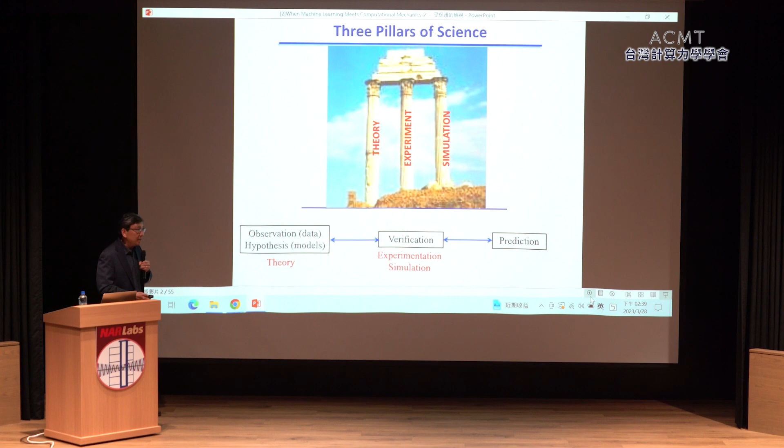Well, I would have to say maybe before 1970s, there's only 2 pillars, theory and experimental work. At that time, people don't trust computation. But now, I think computation comfortably become the 3rd pillar. Well, maybe it's time to add the 4th pillar, right? So let's see. The objective of all the science field, it's all about doing prediction. If the science does not lead to prediction, then it's really not very meaningful. And to do prediction, then you do theory, experimentation, and simulation. So where are we now?

Every time when we model a problem, of course you start with the most important, either physics or chemistry or mechanics or biology for the problem. You first make your decision on that. And then you construct the mathematical models. Some of the mathematical models are reliable, but some are not. So even Newton's law works only up to a certain length scale. Below that it doesn't work, right? And you know quantum mechanics, and everything now becomes statistical. But anyway, this is how we usually do things. And then once you have mathematical models, then you do simulation.

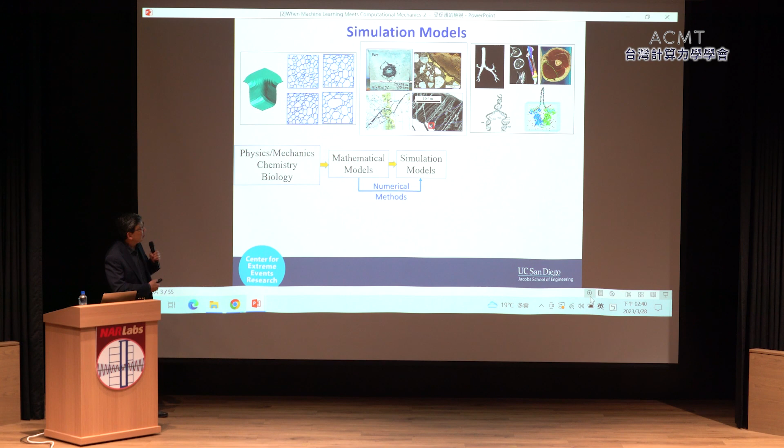So here this is where many of us are working, developing effective numerical methods to solve mathematical equations that are the models of certain physical problems. And then you use computer to do the simulation. But in the end, you always have to ask two questions. Are we solving the equations right? And that's verification. When we develop numerical methods, we always develop mathematical error bounds, you assess how fast the solution converges. Well, first of all, does the solution converge? And then how fast it converges. So that's one type of verification. But the other type of verification, if the problems are too complicated, then you do experiment. But anyway, we do this.

And I will say that finite element method has been developed over 50, 60 years ago, actually 1950s. That's the beginning of finite elements. And until now, there are many different classes of simulation methods, such as Meshfree methods that are actually more recent advancement. Most of the time, I think we do a reasonable job here. And so I think this is most of the time okay. But the next question is, are we solving the right equations? That comes to this. This may or may not be the case.

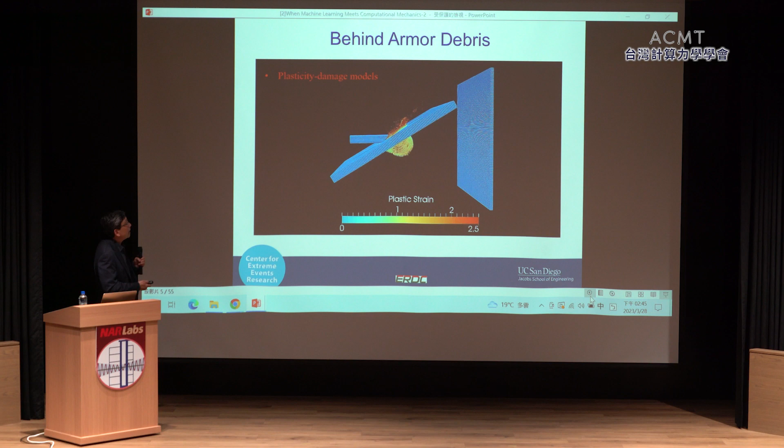Now, if you look at how these problems are modeled, of course we have computational methods, in this case reproducing kernel particle. But then that method uses a lot of different models, plasticity and damage models.

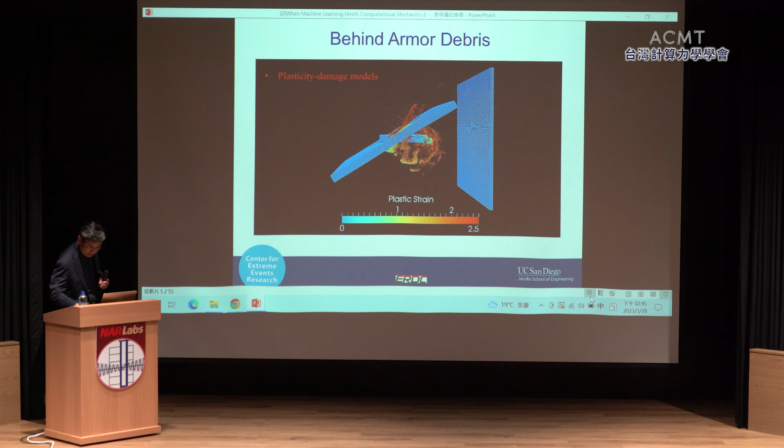I don't know what's going on. It doesn't advance. Yeah.

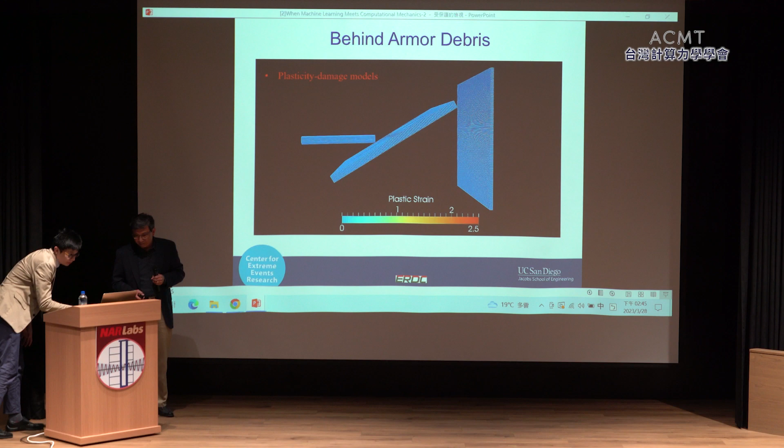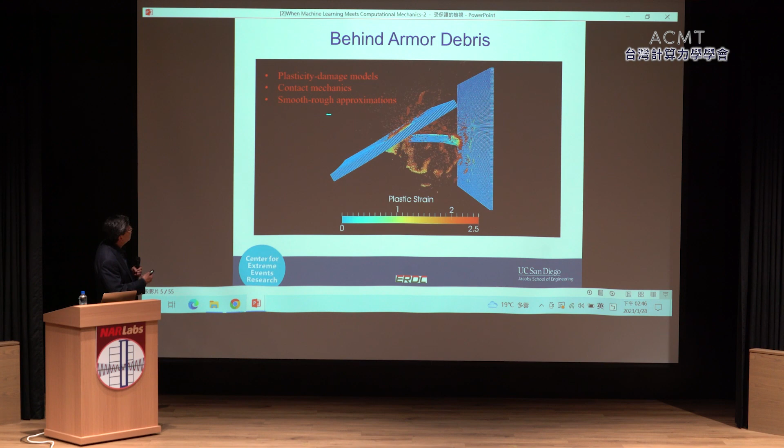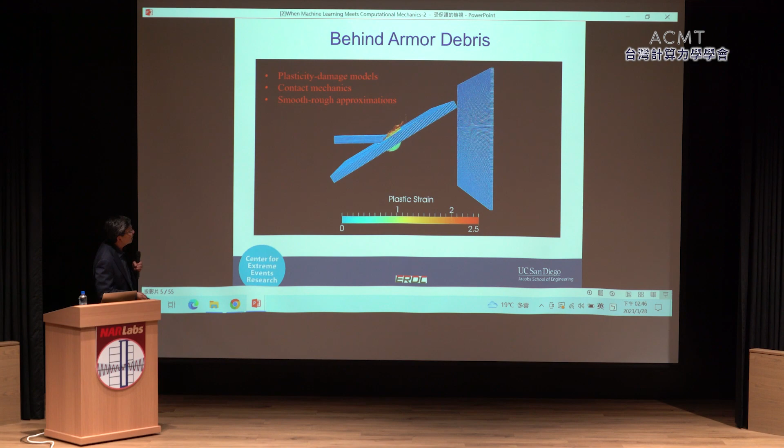Okay, thanks. And then it uses some contact algorithms. It also uses some, because the solution is a combination of smooth and rough solutions. And all of these, if there's a disagreement with the experiment, that's where the major source of error is.

This is the only manufacturing process certified by NASA JPL to make the kind of containers that can collect samples from other planets, like collect samples from the Moon, collect samples from Mars. That kind of container has to be very, very reliable. You don't want any leakage. You don't want any contamination. Right? So this is a so-called solid state manufacturing process.

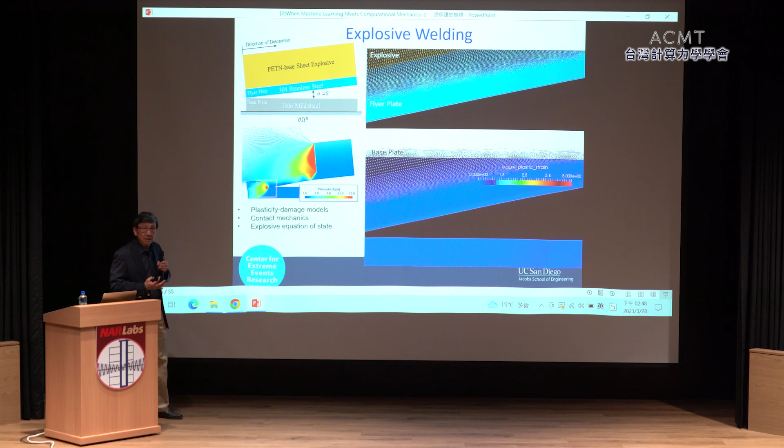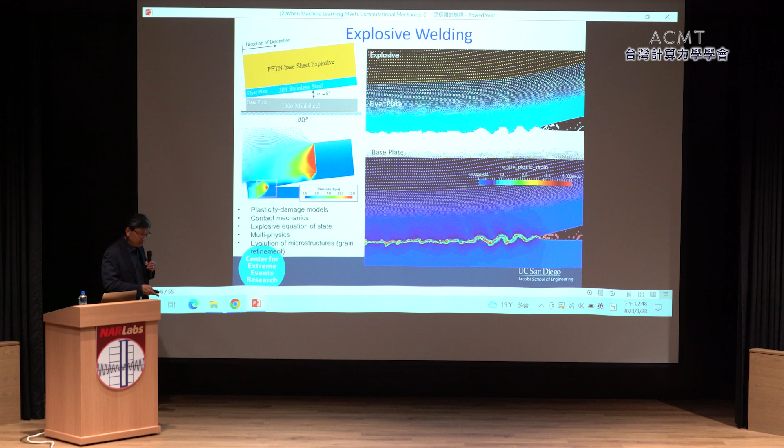And again, contact. Equation of state, that's another major source of error. A lot of equations of state don't really work well when you try to generalize them to different shock wave, explosive, hydrodynamics types of situations that involve multi-physics. And in fact, under very high velocity impact, the crystalline structure of the material undergoes refinement, and that also affects the material properties. So it's just an example demonstrating potential errors from the current state of the art.

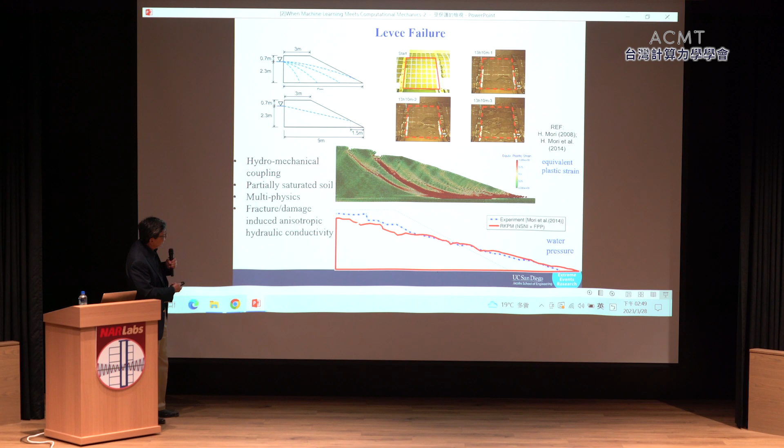This is for civil engineering applications, right? Next slide. So this one, of course, is a hydromechanical coupling problem. There are also models for that, and so on and so forth. But anyway, whenever you see that there's still a slight difference between experimental observation and computation, then you start to think, well, maybe something right here can be improved.

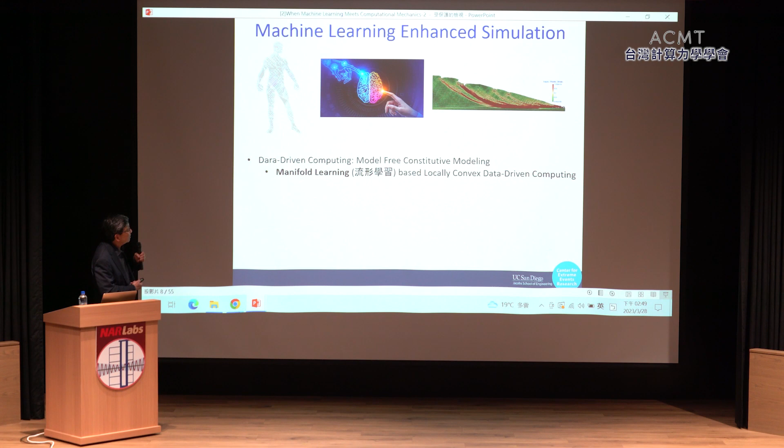Okay, so now we come to the main topic of today's presentation. If a lot of errors actually come from material models, is it possible to avoid using predefined mathematical forms to relate stress to strain in any of the materials? So here, I'm going to introduce manifold learning based on locally convex data-driven computation. Well, all these stress and strain data live in extremely high dimension. In fact, every data point has 12 dimensions, even for isotropic material.

And so searching data in such a high dimension could also lead to stability issues, and sometimes the outliers and the noise make the data search very complicated. Okay, another more recent approach that we're working on in this area is: is it possible to entirely rely on thermodynamics?

Okay, and most engineers, including us, we do conservation laws, and we use them all the time. That's the thermodynamics first law. But quite rarely do we consider the thermodynamics second law.

I used to say that engineers like to solve the problem when there's an equal sign, right? Whenever there's an inequality, most engineers don't like it. And in mathematics, there are always inequalities when you show convergence. Well, the more I work on this, I feel that we should use more inequalities, because having an equality limits your search of solution.

Too limited. If you have inequalities, for example, thermodynamics, it's all about positiveness of entropy and all those things, right? So using thermodynamics could open a door for learning a lot of material behavior that is really hard to predict. And then I'll talk about how we can use neural networks to enhance, for example, Galerkin solutions for some PDEs.

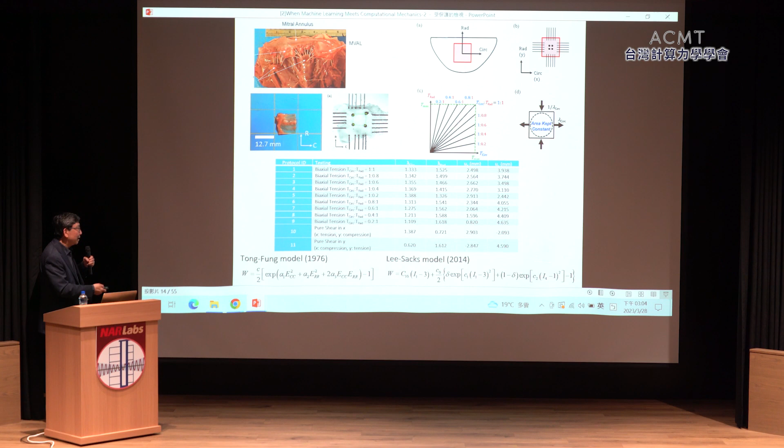There are a few constants. So what you will do is you use all these data points and you do a regression, and then you get all these material constants, and then you use that to predict other types of deformation modes, right? And then there's another, actually it's also getting popular, the model by Lee and Michael Sacks at UT Austin. Anyway, there are also constants, and you can characterize or fit those constants, and then use the model for prediction.

So let's do a comparison. Using the Tong-Fung model, you see some deviations in the compression range. This is the Lee-Sacks model. You also see some deviations. And this is model-free, entirely based on data. Well, this is not the end of the story, because the data lives in extremely high dimension. And so doing data search could be very expensive.

So we further introduce deep autoencoders. The idea is to project the high dimensional data onto the lower dimensional, so-called embedding layer. So graphically, it's almost like projecting this onto a ring. And then we can extract any features that you wish to extract, or relate some quantity to another quantity. You can do it much easier in this lower dimensional embedded space.

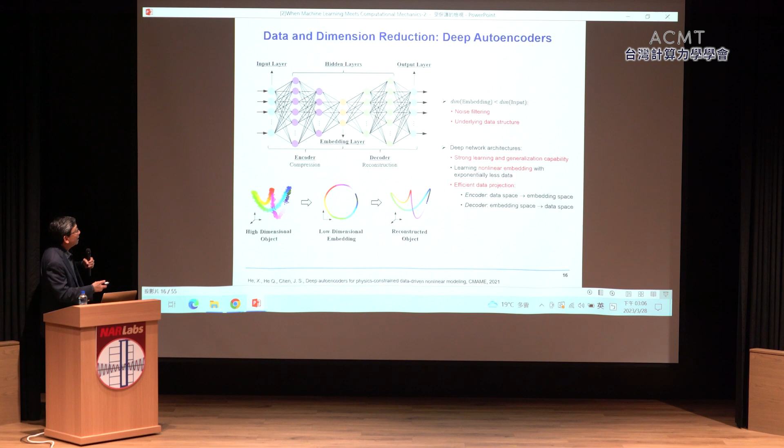And it can be shown that with this encoder and decoder, you can actually take the low dimensional data and reconstruct the data in the original high dimension. This process actually has the ability to filter the noise and to recognize the underlying data structures. The approach is also very generalizable to do the prediction.

Okay, so compared to the first method that I introduced, which is locally convex data-driven computing, every time we have a global physical state, we search for data in the local convex hull, but in the high dimensional space. Now with this autoencoder approach, we do it offline by projecting the data onto the embedding space, and then we search for the data in this much lower dimensional space. And then, if necessary, you can do decoding and project the data points back to the high dimensional data space.

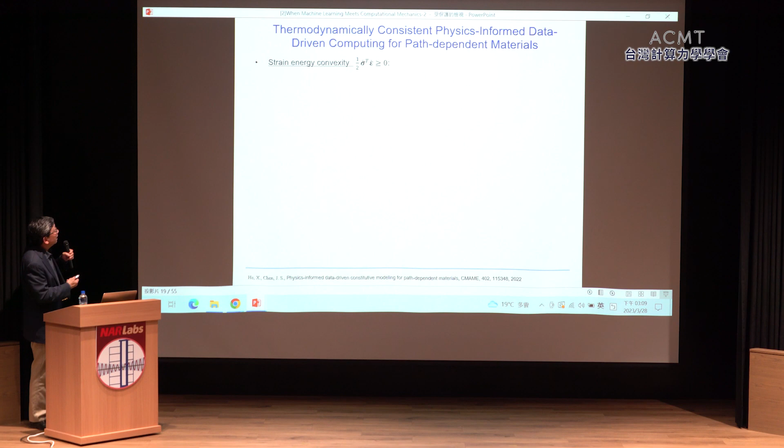Okay, so thermodynamics, there's several considerations here: strain energy convexity, rate of mechanical dissipation, frame indifference, time consistency. Small strain should always lead to small stress increments. And then, with the thermodynamics-consistent recurrent neural network, which I'm going to introduce, all it requires is some measurable material states, for example, stress and strain, and then we can use that to train the data, and then automatically identify the internal state variables.

And once the internal state variables are identified, you can compute everything else. You can compute entropy, you can compute energy dissipation, for given strain you can compute stress. So that's the idea. Now, conventional recurrent neural networks have actually been used to try to predict the path-dependent material

behavior. The main idea is that every time you try to predict, say, for a given strain, the stress at the next time step, you will use a lot of information from the past, for example, 20 steps or 10 steps, and use all that history information to predict how the material is going to behave in the next step. And it has been shown that actually error accumulates from step to step. So as you introduce more and more loading steps, the error accumulates.

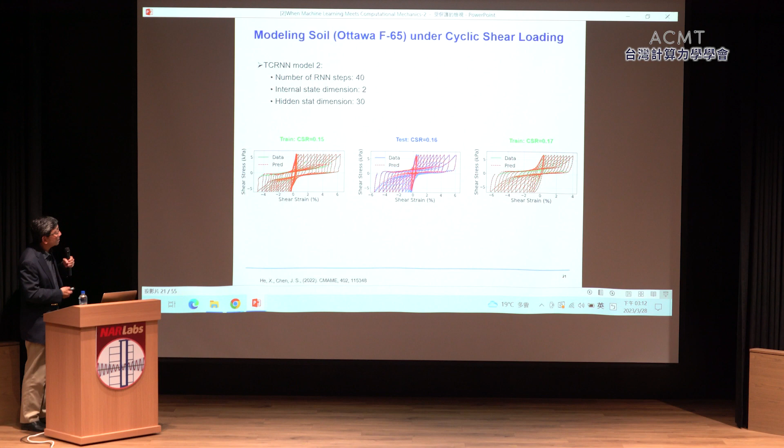Once the internal state variables are identified, from there and all this information you can compute the Helmholtz free energy. From the internal state variables and Helmholtz free energy, you can then compute entropy if temperature is also involved, compute the mechanical energy dissipation, and you can also compute the stress. And you can compute anything else. Okay, so now you can predict this kind of behavior. This is very difficult to predict, even with any of the existing plasticity models. But I think this algorithm seems to do a reasonable job.

All right, now the next topic I want to talk about: is it possible to use a neural network to enhance, for example, a finite element solution, or maybe a meshfree RKPM solution, or if somebody is working on phase field or other things? Is it possible to use a neural network as an enhancement of a Galerkin solution? So the problem we choose here is to model fractures. Because if the problem is simple enough and everything is smooth, I think the variational methods are good enough, and we don't really have to worry about that.

But problems with fractures are still considered very challenging, even today, right? Because you don't know where the crack is going to grow. You have to do continuous mesh refinement to capture the crack tip behavior, and so on and so forth. So the proposed method is this. I don't like to do mesh refinement. I hope I don't have to do mesh refinement. I will have just sort of a background grid.

The background grid will be the grid points used to construct the smooth part of the solution. And then on top of that, there will be cracks that are going to be initiated and then propagate. We will use a neural network to capture those rough solutions, because rough solutions are much more difficult to predict or to represent in the conventional Galerkin type of method. Okay, so again, for the smooth part of the solution, we just use, for example, RKPM, which provides a smooth solution as a background solution.

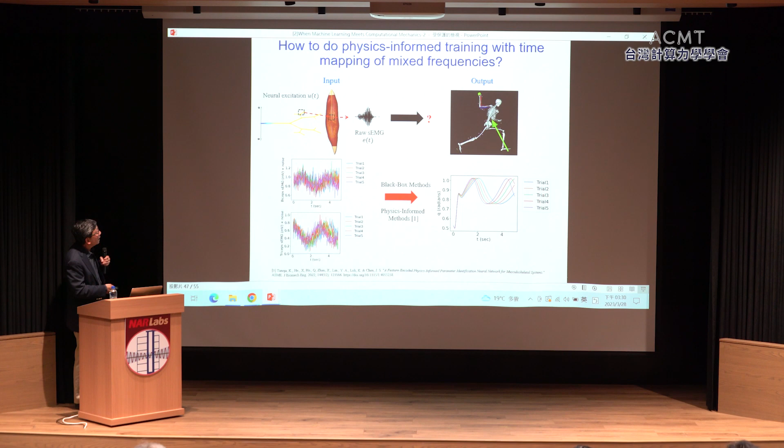And just wanted to say that, so this is our student. So these are the markers that measure the joint motion right here. Here we have some wearable sensors put right here to measure the muscle contraction histories for bicep, tricep, and other pieces of muscles.

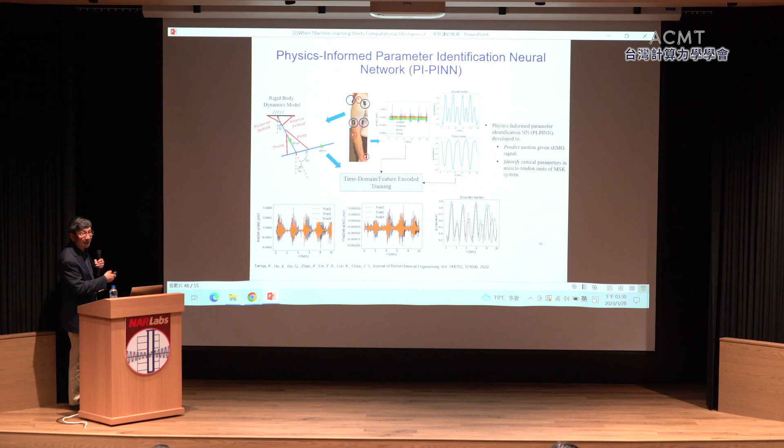Now the key, I should say, the major difficulty here is that all the muscle activation functions are with extremely high frequency. The wavelengths are so small because you measure at a very small length scale. Whereas this is with a very high frequency, the body motion is with a very low frequency. And then you try to map this to this through some physics laws, the multi-body dynamics. It makes the mapping very difficult.

And one approach that we took is to map the time history functions to a set of coefficients or basis functions. Right? So for example, you can use Fourier basis plus polynomials. So instead of having a time history, you now have a set of coefficients for this muscle activation function. And then you do the same thing for the joint motion. Also map them to a set of coefficients of Fourier basis and polynomial basis.

So now all you are doing here is the mapping between two sets of coefficients, while also satisfying the multi-body dynamics. And that mapping is a lot easier. So this is the time history mapping with the physics-informed multi-body dynamics. And you see that the results are very noisy, and it doesn't really agree very well with the measured joint motion. But this one is much better.

Another approach that we have introduced is to use multi-resolution to decompose the data using wavelet basis, project them into coarser and coarser scales, and use the coarser scale to do the training. And then you train a model, you then transfer the training to the next finer model, and pass on to the next finer model. So finally, that mapping at the full scale can be mapped to the joint motion in a more effective way.

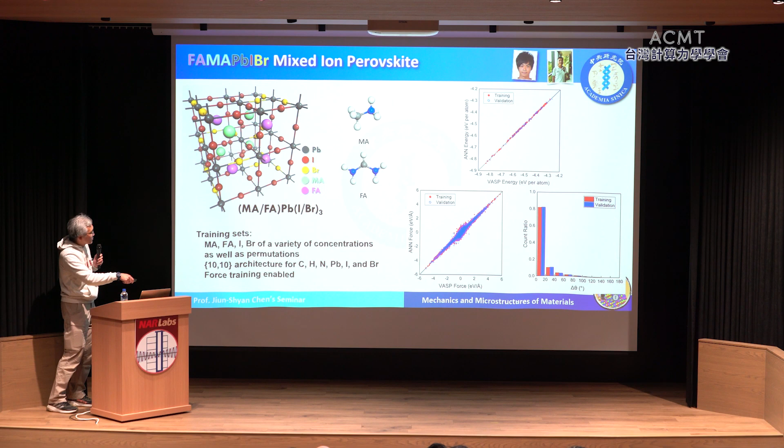The horizontal axis shows the ground truth from VASP calculation, and the vertical axis shows the prediction from the neural network. And you can see that the parity is pretty good. We also have a very good parity for atomic forces. Because this is much faster than DFT calculation, and almost as accurate, we can use it to do extensive sampling over the compositional space.

So this is the concentration of bromine, and this is the concentration of methylammonium. We can isolate all the low energy structures and use them to compute the band gap and compare with experiments. Furthermore, because the neural network model is very efficient and fast, it allows us to map a lot of physical and mechanical properties of this complex perovskite, and build a Pearson correlation matrix to reveal the processing, structure and property relationship of this complex perovskite material.

So we can find the correlation between the concentration of constituents and structural properties like shear strength and volumetric strength, and finally the properties. So we can use this to find out the composition regime that can potentially lead to phase segregation and relatively poor device performance.

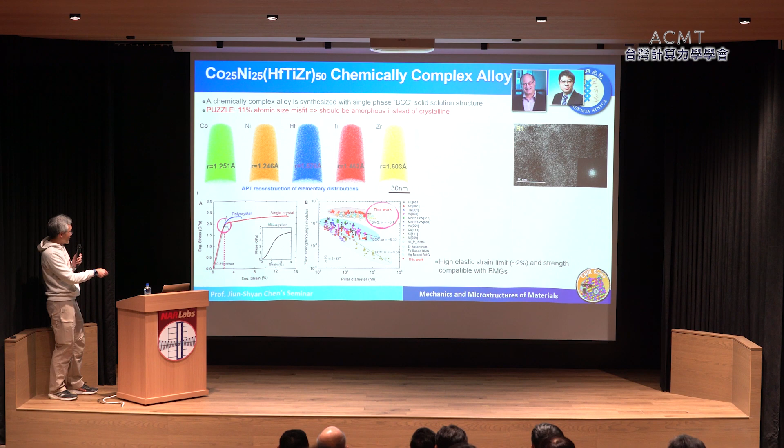And then the next one is that recently we have joined work with Professor Srolovitz and Professor Yang Yong at Hong Kong, and they synthesized this chemically complex alloy with a very high elastic limit. And the most interesting thing about this alloy is that upon plastic deformation, it can show both a crystalline phase and also, as you can see from here, an amorphous phase. So when it yields, it can have both crystalline and amorphous phase.

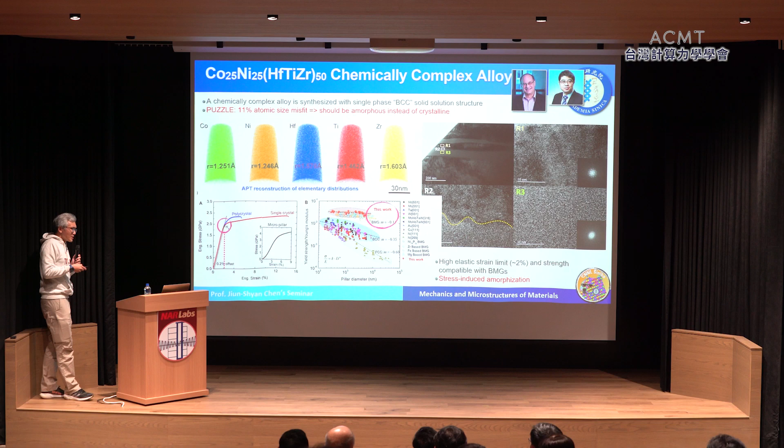So we want to study the large scale plastic response of this material. So we use another machine learning-based energy model called the spectral neighbor analysis potential, and it is similar to the artificial neural network. So we start once again from Cartesian coordinates, and then we convert them into another set of feature vectors or embeddings.

So we convert them into bispectrum components, and then once again pass through a linear summation with this very simple, or you can say it's equivalent to a one-layer neural network, and then we can obtain once again the total energy. And so this is done by my current postdoc, and this is basically the training flow.

So we once again start from a large set of quantum chemistry training data, and then feed all these parameters. And once again, these are the training results. So this is the energy from DFT calculation, and the energy predicted from this SNAP potential model. So they are in very good agreement, and this is atomic force. And with this, we can perform very large scale simulations.

So these results are from DFT calculation, and these are basically the size limits that allow us to use DFT. But using the machine learning potential, we can do this. And this is the simulation of a compression of a nanopillar of this alloy. And you can find dislocation nucleation and the formation of an amorphous shear band. So this is identical with the experimental observations.

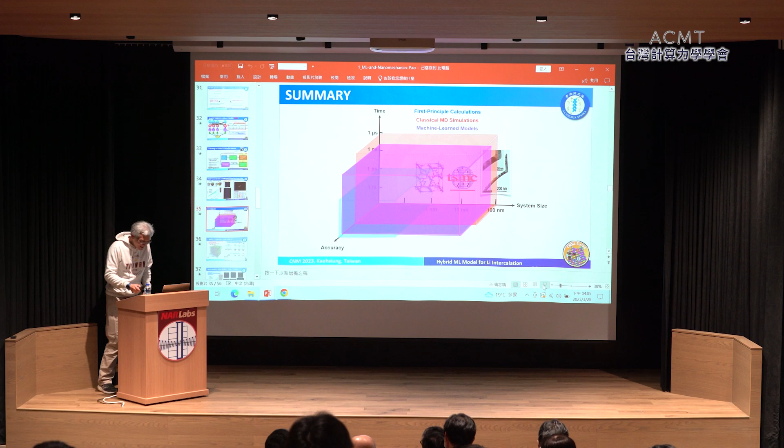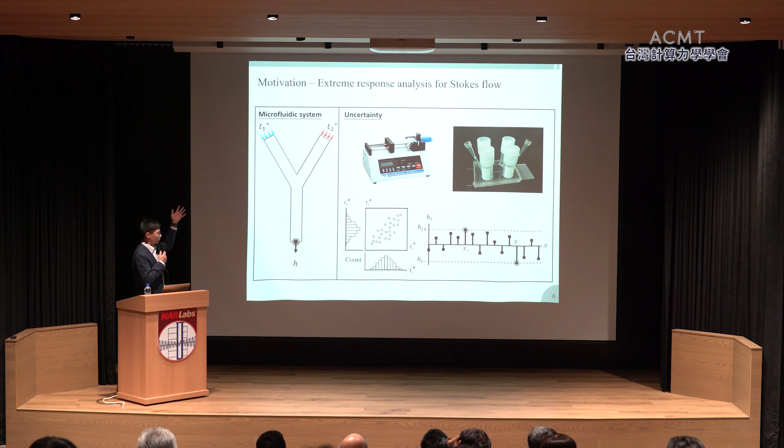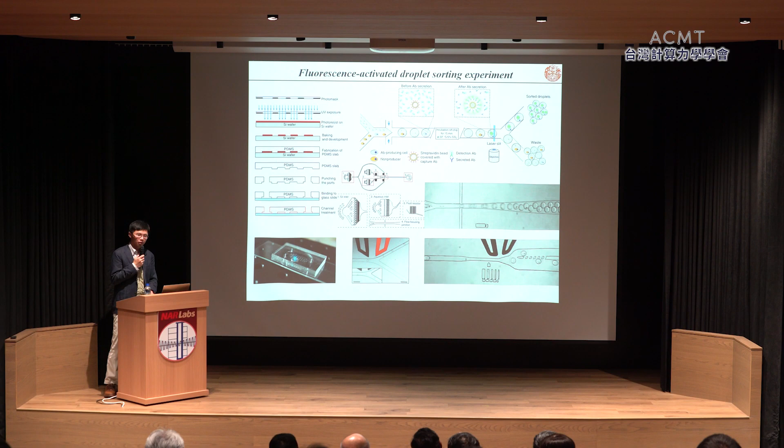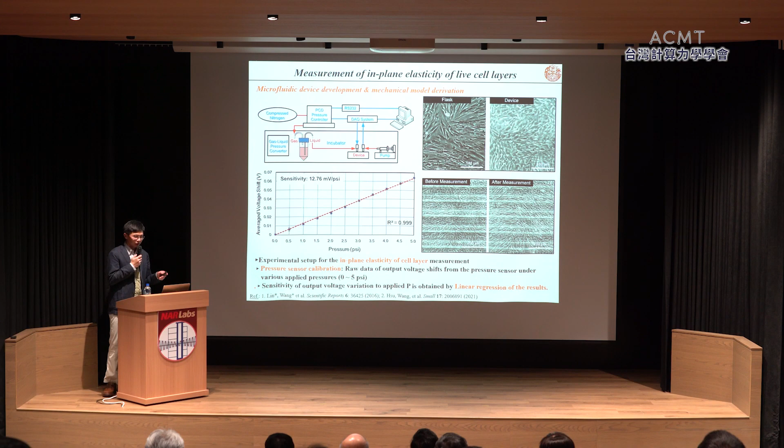So usually when we write an article, we need to describe the standard deviation of your experimental result. So I know I may get several questions. What's the error source? What's the deviation? Why do you have this deviation? So like this control measurement, and after the cell removal, if our experimental system is robust, actually this after the removal should be identical to the original control experimental setting. But usually we cannot get an identical one. So I skip many details.

So I think 2 points. One is identifying those extreme events. Second point is how to remove those noise. So here I pick up the easiest fluid dynamics model called Stokes flow, because this flow is a linear model. It's very similar to the solid mechanics, the linear elasticity.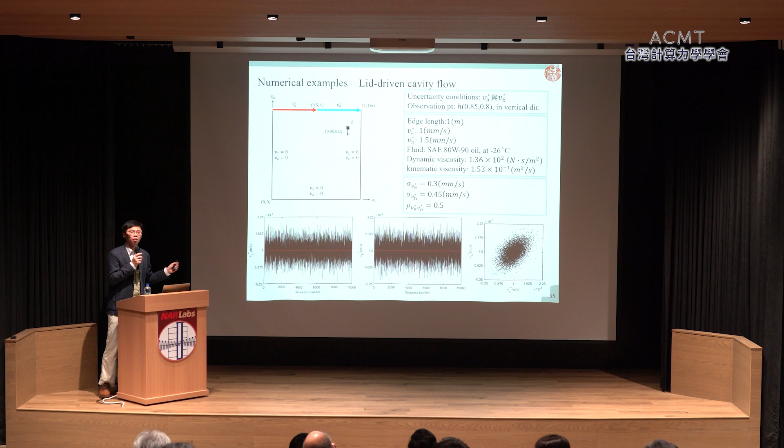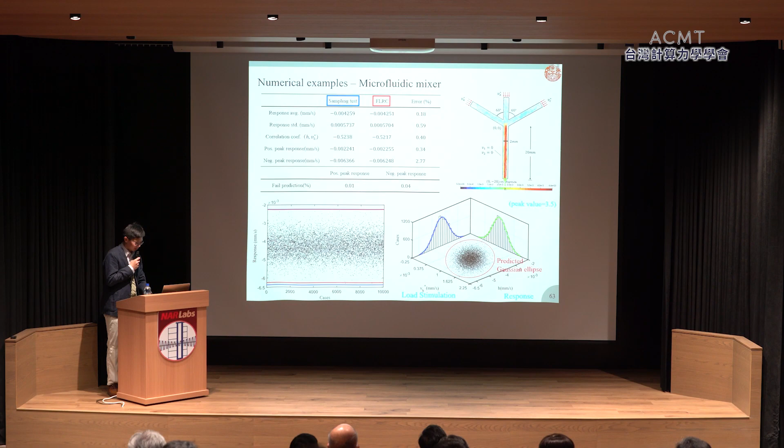So I have some results. So here is the lid-driven cavity flow. It's a very typical demonstration example. Suppose the excitation has some uncertainty. We describe the uncertainty in terms of average, standard deviation, and the correlation coefficient. As long as we have this clue, we can analytically get the extreme response prediction. Here, many dots mean I think 10,000 sampling tests. So I think this result is quite reliable. So I just skip those results. I will move to the second point, the measurement noise reduction.

Okay. So because we know the signal contains the data plus noise, our job is to make the noise minimized as much as possible. So here the theory is that we just compare the measurement and the theoretical distribution, and try to minimize their discrepancy. I think the constraint is important.

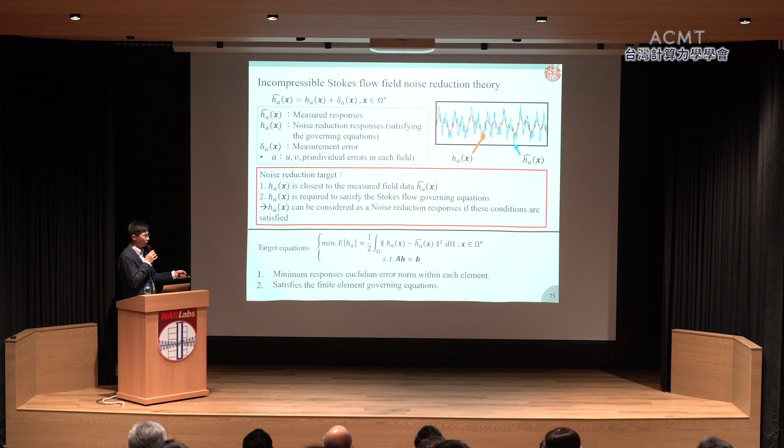We believe the data distribution should follow Stokes flow. So I think this is a typical procedure. You can list the quadrature and use the Lagrange multiplier. So I think here the finite element framework is important because you can express your data points through the nodal variables.

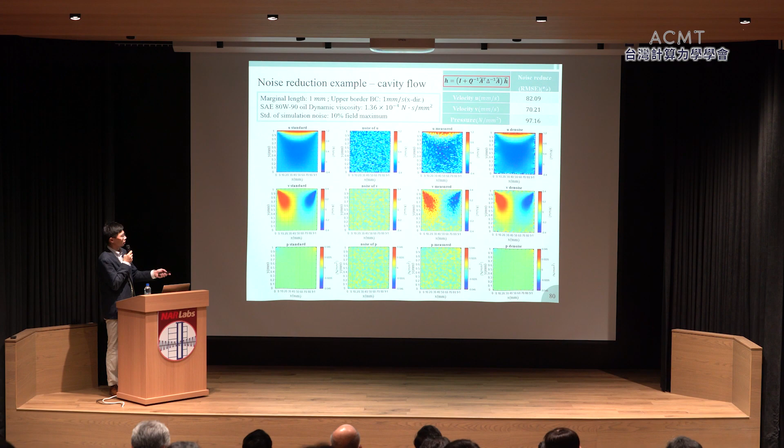So here, as you can see, the third column is the measured data, and after the noise removal, we can get the clean measurement field. And we also apply this technique to a real experimental data set. Here is the fly brain, because if the fly has some disease, the brain may have significant deformation.

But biologists just take images, they cannot extract numbers, right? But mechanicians like you can get a number from the image through what we call the reference map technique. Basically, we describe the mechanics theory in the Euler framework instead of Lagrange, because if we describe the solid material constitutive law or equilibrium equation in the Euler framework, there's no gap between the surrounding fluid and the solid materials.

I'm still working on this topic. Hope I can share my results with you soon. I think that's it for my talk. Thank you very much.

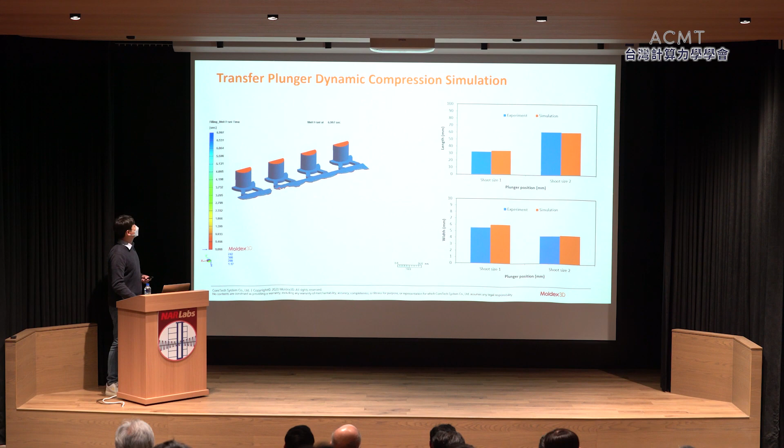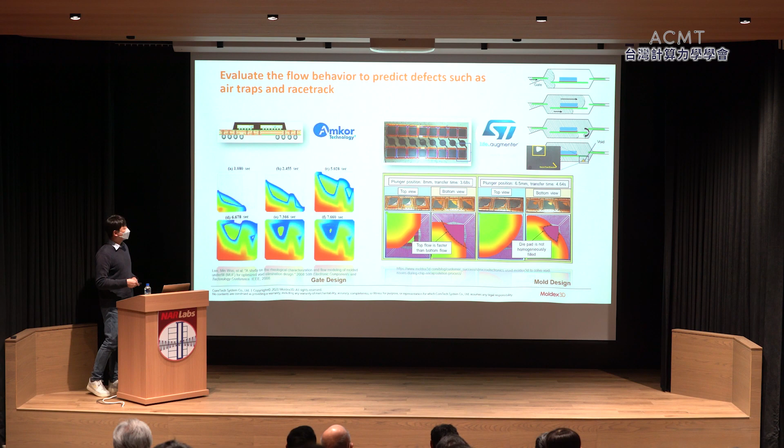For conventional IC packaging processes like transfer molding, mostly using strip level packaging, we can see the molding compound pellets inside the plunger. We compress and melt them and inject them into the mold. This is the so-called transfer molding. Using numerical simulation, we can adjust our gate position and improve our mold design. We can also predict voids, change our vent location, and change the flow rate and temperature to find the optimal design.

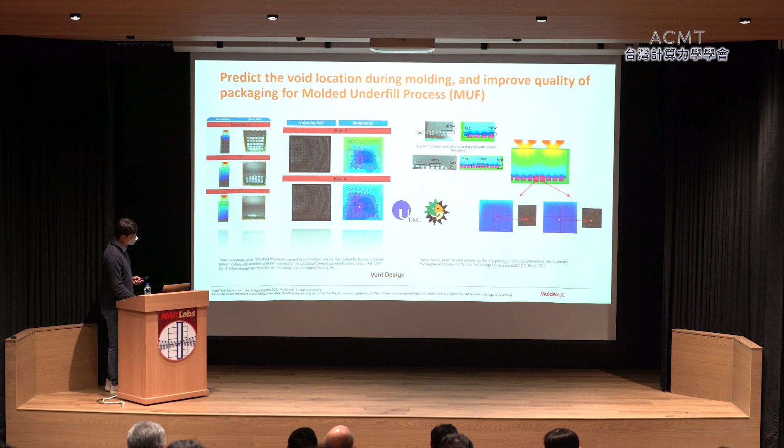In the meantime, we can also do fluid-structure interaction computation to predict copper and gold wire deformation and prevent wire crossover and contact, as well as predict the deformation of the lead frame.

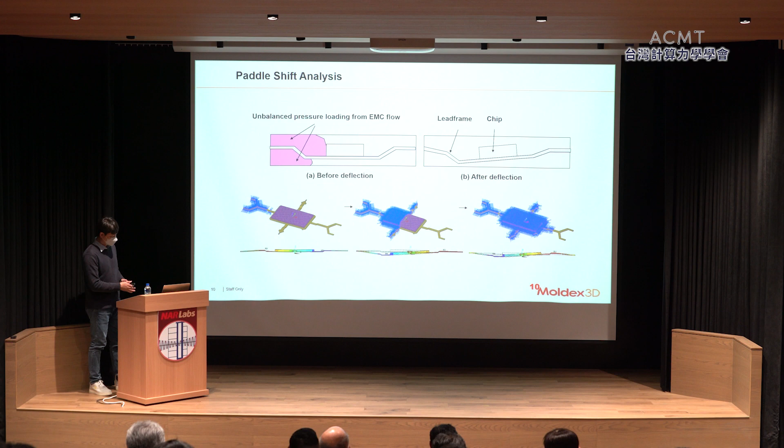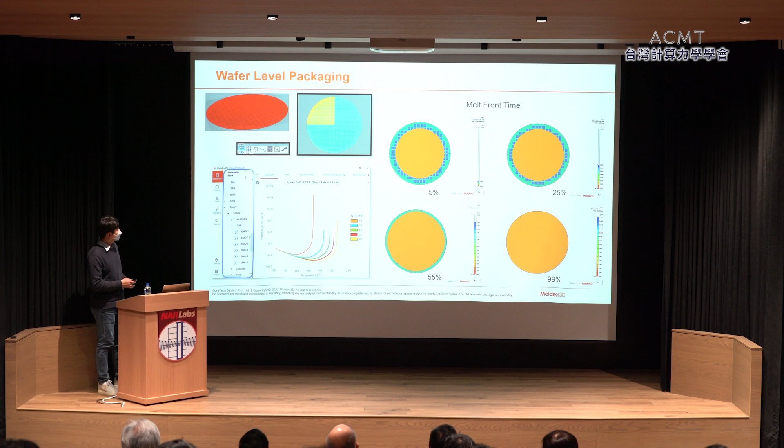Another conventional IC packaging process, mostly used at the wafer level or panel level, is compression molding. Here there is a very large wafer, and we mount several chips on the wafer. Then we put powder or liquid molding compound on it, and move the moving mold to compress it. Using numerical simulation, we can predict potential void locations to avoid them, and we can also get all the physical variables from the results, like pressure, temperature, shear stress, conversion, and warpage.

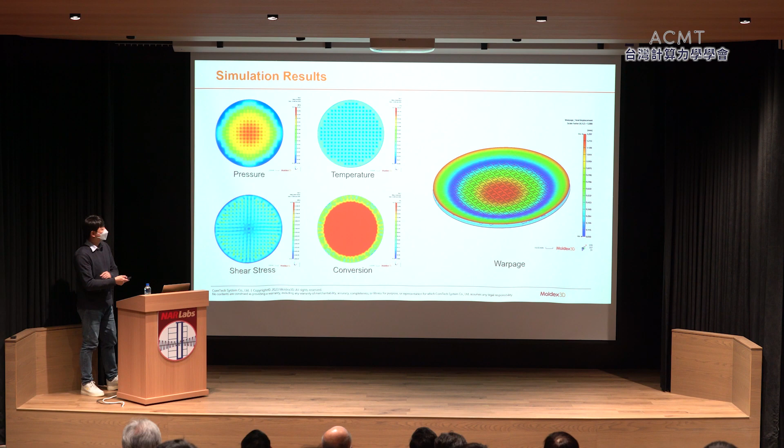By FSI computation, we can also predict the displacement of the die, because in the compression molding process the shear stress is very large. And we can also compare the shear stress and the bonding strength at different temperatures and times to make sure the bonding strength is enough to withstand the shear stress.

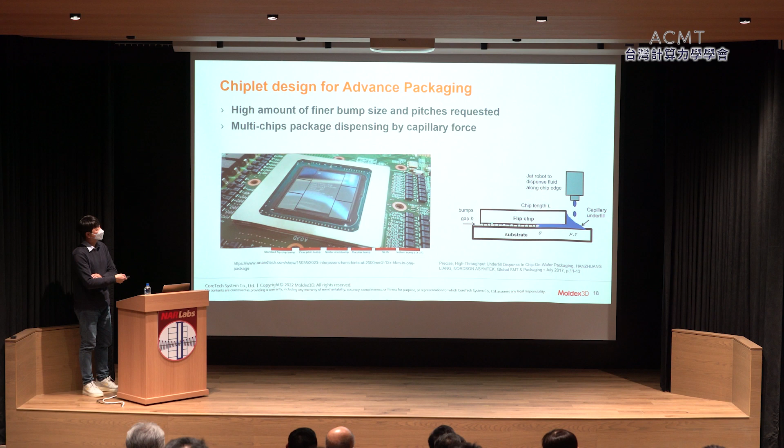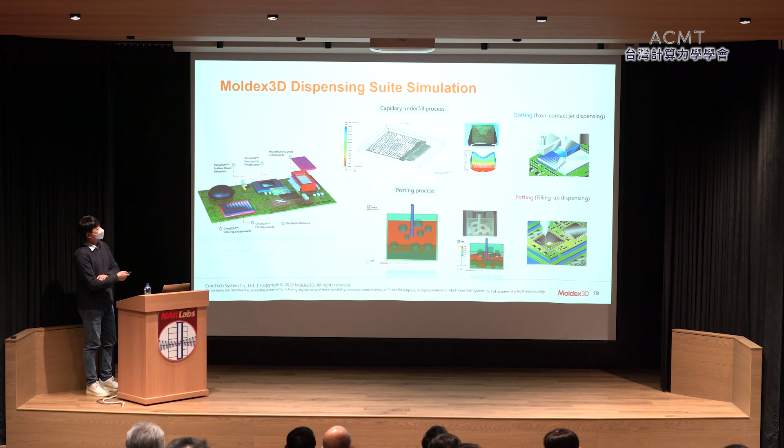Advanced packaging processes are mostly underfill type processes. Currently, chiplet design is very popular, and people would like to put multiple chips on the same package, and the gap under the chip is very small. Therefore, we need to use underfill to encapsulate the gap, with processes like capillary underfill, dotting and potting.

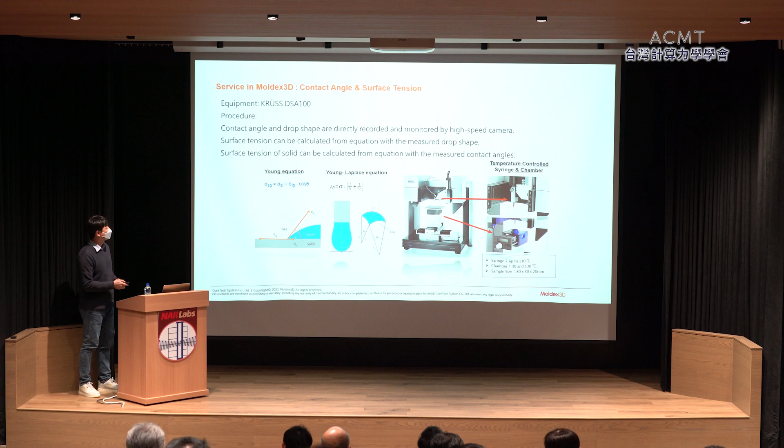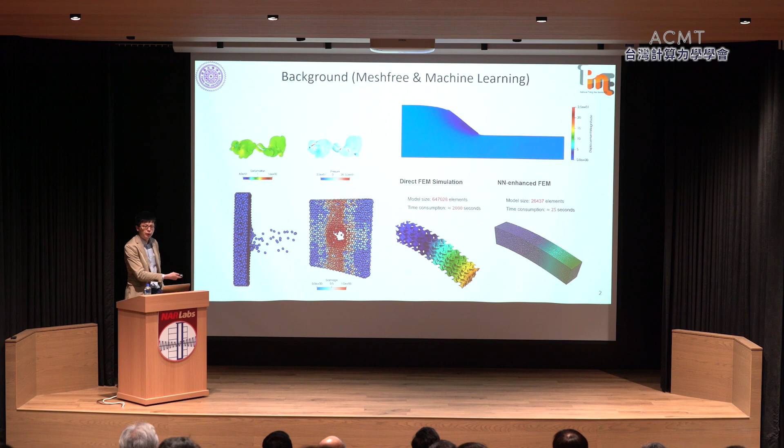And also recently using neural network enhancement to speed up the finite element method and do homogenization for multi-scale modeling, and also using neural network machine learning to enhance the Meshfree method, as shown in this talk. So you can see that I mostly work on Lagrangian solid mechanics, but why did I choose Eulerian advection as my research topic here?

The reason is I want to challenge one concept: you mostly see Meshfree methods modeling fluid flow like this in Lagrangian mechanics, making use of the Meshfree property, but that doesn't mean you cannot use it for Eulerian simulations that involve advection. And advection is a very important phenomenon for shock waves and turbulence. So I want to show that Meshfree can also do that, because most of you may use finite volume, finite element, or IGA to do that.

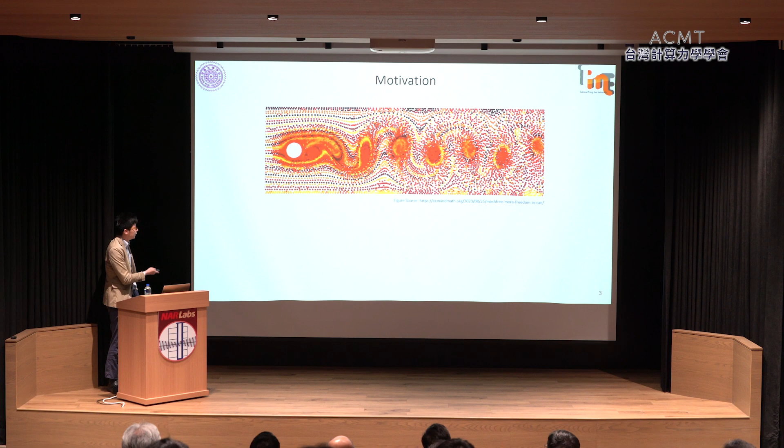But I will show you that I can improve the performance of the Meshfree method in Eulerian mechanics for modeling advection, and also that I can use that concept to develop new machine learning methods inspired by Meshfree. So I'll use the standard advection diffusion equation to demonstrate the idea, although the formulation can be extended to the Navier-Stokes equations, which I have already done.

This is the strong form of the problem, where LU is the flux divergence operator including the advection and diffusion flux. By the standard integration by parts procedure, you get the Galerkin weak form as shown here. But it is well known that the traditional Galerkin formulation suffers from numerical instability: you will see strong oscillation and numerical artifacts near the boundary, especially at a high Péclet number, meaning the advection is really strong.

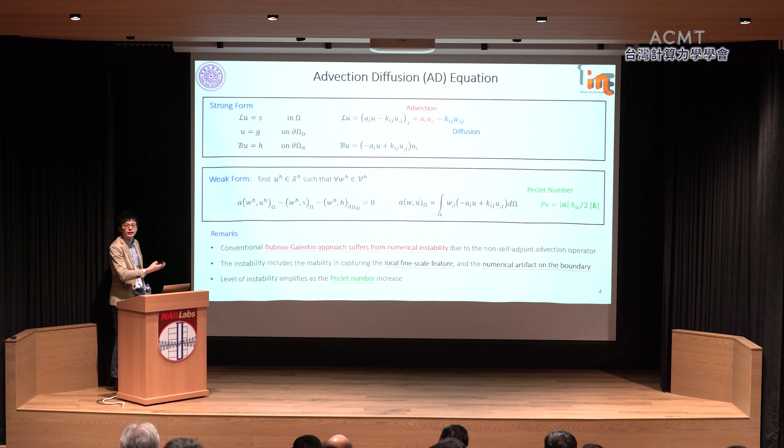So there's a well-known method by Tom Hughes, the variational multi-scale method. You can use that to stabilize the results, and for boundary conditions, you can use weakly imposed boundary conditions by Yuri Bazilevs and Tom Hughes to solve the problem. The idea is to introduce streamline upwinding, the well-known SUPG formulation, and also a Nitsche-like formulation to impose compatibility, regularization on the inflow and outflow, and introduce additional coercivity to enhance solution stability.

And here we choose Meshfree reproducing kernel approximation due to the advantages that Chen had mentioned before: the control of local smoothness, the order of completeness, etc. And because of efficiency, in Meshfree method, we usually adopt nodal quadrature. But the methodology that I show next does not restrict to Meshfree. You can do that for IGA, for FEM as well, as long as you are using low order quadrature.

And here I'll show two figures about using the above schemes on a simple 1D advection diffusion equation. This will be the convergence plot you will obtain. The colorful curves are from nodal integration. You will get only a rate of 1, although you're using linear approximation. Unless you are using high order Gauss integration, then you can get the desired convergence rate, but that will be cumbersome, of course.

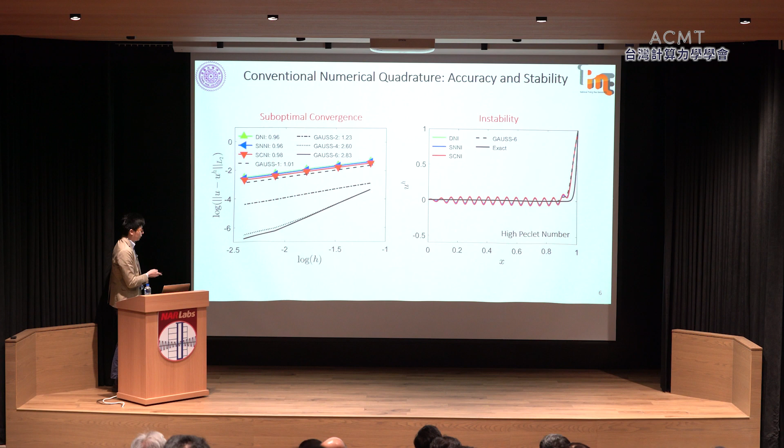So in order to address that, I basically borrow this idea from JS' earlier work. One is called variationally consistent integration. The other is called NSNI, which is a gradient-based stabilization. So the first one, the accuracy loss is due to the inability of the approximation, especially for the test function, to reproduce Galerkin exactness in the variational equation, especially for the advection term.

So the idea here is I assume the trial function is a linear field with a specific test function and substitute into the weak form of the advection equation. For the diffusion part, you'll find out that the test function needs to satisfy the divergence theorem, which is called a linear constraint in the VC paper. But for the advection part, the tricky thing is it actually requires the so-called quadratic condition in the VCI paper. So we need an extended condition to impose for the test function.

So the main point here is that even for linear approximation, you need a quadratic correction for the test function. And you can use the assumed gradient approach by imposing this error residual shown here back into the test function to correct the error. Then you can recover the optimal convergence.

The second enhancement you can do is by using the gradient type stabilization, introducing the high order Taylor expansion on the test function and trial function. And the key here is to introduce that to the VMS term, the variational multiscale term, instead of the advection term, because first you will violate the VC2 condition if you simply do

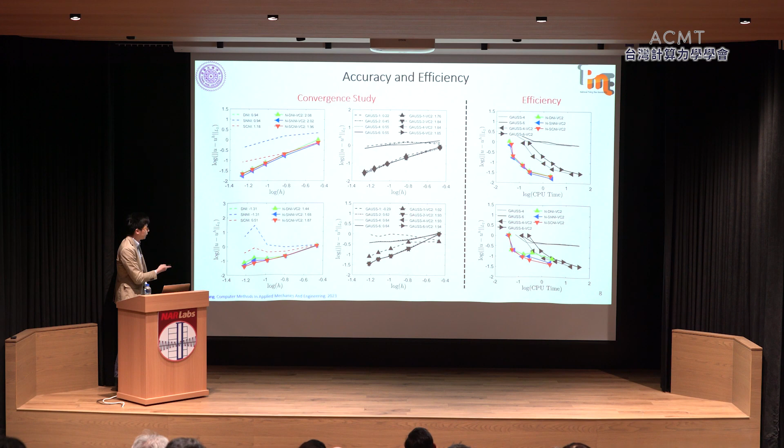So I want to dive into machine learning. I have to mention this famous work by Professor Karniadakis from Brown, the famous physics-informed neural networks. By formulating a least square like energy functional and minimizing it through the penalty formulation, since this is a multitask problem, we have to introduce penalty parameters to impose the constraints.

We can solve the problem in a strong form sense, and physics-informed networks are actually more like a Meshfree method. You don't need the discretization. All you need to do is choose different sampling points, then formulate the physical laws in least square type by penalty method and optimize it. You can use TensorFlow, you can use PyTorch.

But you will find the problem is that the penalty parameter will be tricky in the advection-diffusion problem, because if you choose a large penalty parameter, you get ill condition. If you choose it too low, you cannot impose it. And also, we found out that the boundary condition, the inflow and outflow, actually need different regularization. That will become the issue in modeling. If you're really modeling the fluid problem, you'll find out that not all the schemes really converge.

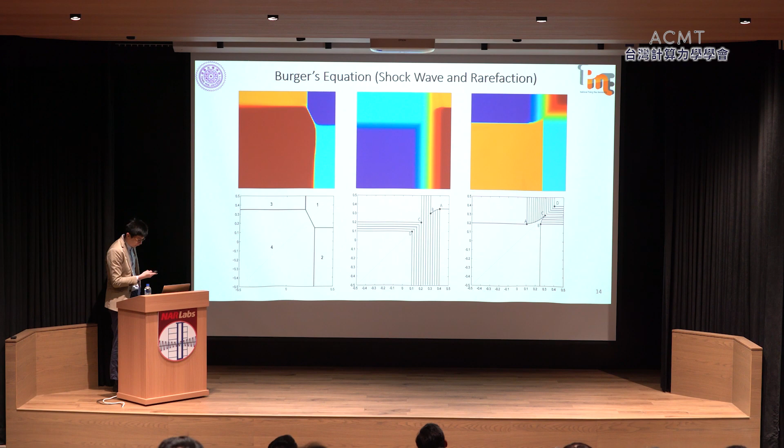So due to the time issue, I'll just quickly conclude. I provide a meshfree correction to model advection. I used to work on conventional meshfree numerical methods, but now even though machine learning is a popular field, I'm not afraid of that. Some of the ideas from numerical methods, developed by mathematicians, can actually be used in machine learning. That's what I'm trying to say. And we can get better convergence, robust simulation results, and outstanding efficiency. So with that, I will conclude my talk.